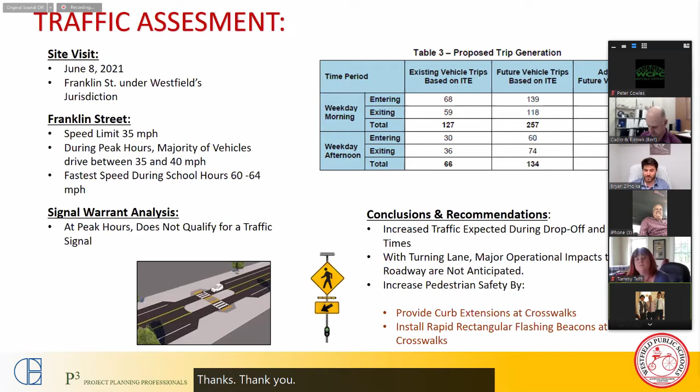Okay. So we can get to the school update now.

First, the site plan. There's been some development since you guys last saw the site plan, I think. We've gone from 4 curb cuts onto Franklin Street to 3, kind of based on feedback from the city, and just the proximity of the bus drop-off lane and the parent drop-off lane, and then you've got the parking lot. So we did kind of simplify that a little bit.

Sorry about that glitch. We've also reversed the flow. So parent drop-offs come in through the parking lot, and then they leave on a shared exit with the buses. And that allows for stacking of 34 cars at any given time.

As you heard, Bryan, I think that this is something that we want to talk about as we develop the project more. If he's talking about possibly 300 cars showing up in the morning, we'll want to think about how we're going to deal with that. So, but at least this has kind of doubled what we had previously with just the cars coming in directly off Franklin Street and dropping the students off.

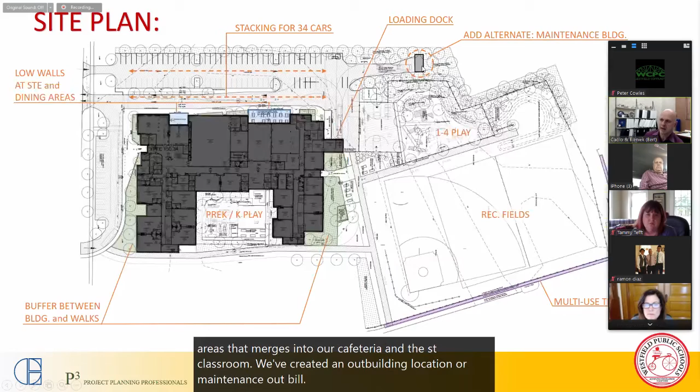We've added some low walls around the outdoor areas that are adjacent to our cafeteria and the STE classroom. We've created a maintenance outbuilding location as an add alternate to the project. That's also a turnaround lane for the truck, so they'll pull in, they'll back up to a loading dock, which

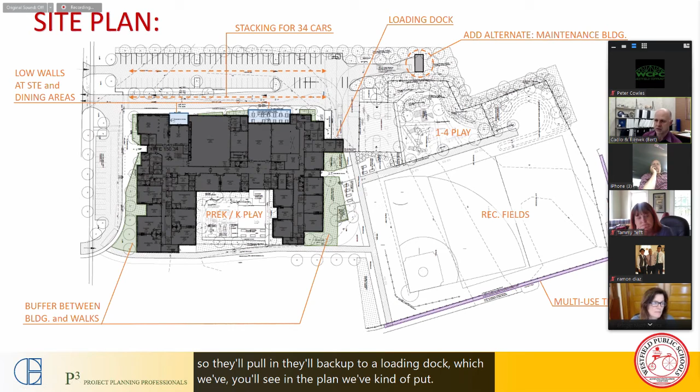you'll see in the plan, we've kind of pushed a loading dock and receiving area out the north end of the building. The grade works well for this so that we don't have to really construct a truck ramp down with drainage and everything, because the grade at the north side of the building is about 3 to 4 feet lower than it is when you enter at Franklin Street off the bus loop.

So the other major thing that we did is we've taken the access to the multi-use path up on the dike that's planned and moved that to Franklin Street rather than coming in at the amphitheater where we'd previously shown it. And that just keeps that access point completely outside of the school grounds, but still readily accessible to the staff if they want to take their kids up onto the path and into wetlands or to the park down the road.

Then the last thing we did is we've created some landscape buffers between the sidewalks that face public areas and the classroom windows, just as an area that, you know, people aren't supposed to be there. So if somebody sees someone up near a window, it's more obvious than if it was all a paved plaza right up to the windows. So it's just a little security thing that we added. So that's the development of the site plan.

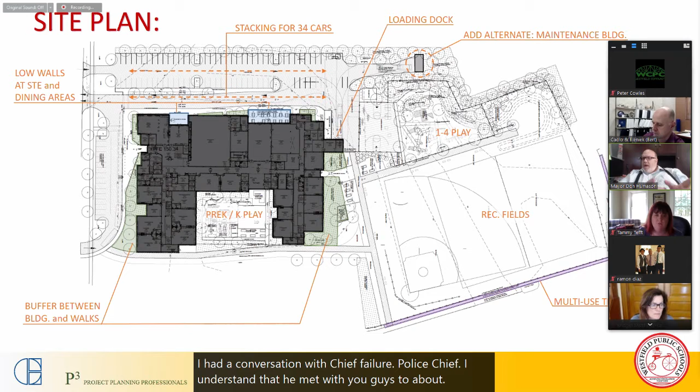Hey, Bert, can I interrupt for a second? Yep. I had a conversation with Chief Valliere, our police chief. I understand that he met with you guys too about the situation in the back with the rec fields and parking around the fields. And I just want to make sure that he had conveyed his concerns about what he thought might happen with people parking back there.

Yeah, so it's not really reflected here, but between the purple line and the property line here, we're going to incorporate some parallel parking spaces. Okay. To get them off the street. That's kind of based on that conversation. The whole moving of this path access is also part of that conversation. His suggestion to do that.

So yeah, we're trying to accommodate as much of this feedback as we can as we meet with various stakeholders in the city. And the police department and fire department obviously are primary contacts and a great resource for us as we're planning the overall layout of the site and the building. Good. As long as you communicate, that's good. Yep. Thank you.

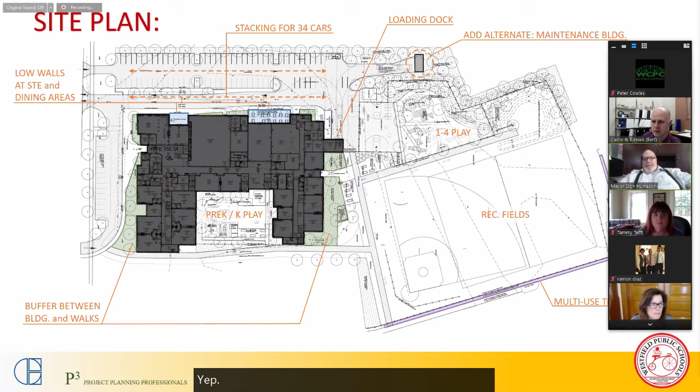As far as the floor plan goes, this is the first floor. I'm going to show you the first floor first. Like I said, the only significant change since we showed you the plans last is that the kitchen has been enlarged, and that's pushed some of our service spaces program outside the building. But in a way, it's fortuitous because it really helps for trucks backing up and having a proper loading dock. We're still within our grossing factor when we do this.

But the larger kitchen exceeds MSBA's guidelines, and that was not reflected in the PSR where they were approving and disapproving things. We're still going to make a case that it's needed for the school and should be reimbursed. And the reason is that this is a CEP school, a community eligibility provision school. So all kids that go to this school are eligible for the free lunch program, and they've got an 80 to 90% participation rate at both Abner and Franklin.

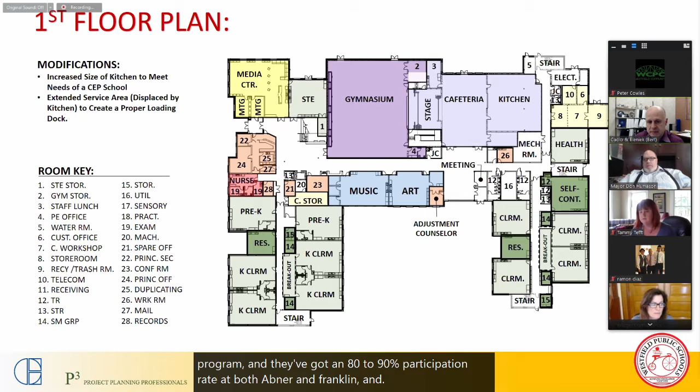MSBA's guidelines don't factor that kind of high percentage rate for lunch participation when they size a kitchen. And we want the school to function for you. We don't want you to open up the school with a kitchen that's going to be too small. So we added about 620 square feet to the kitchen and squared it off, and that would give you the space that you need to support that kind of volume of meals at breakfast and lunch.

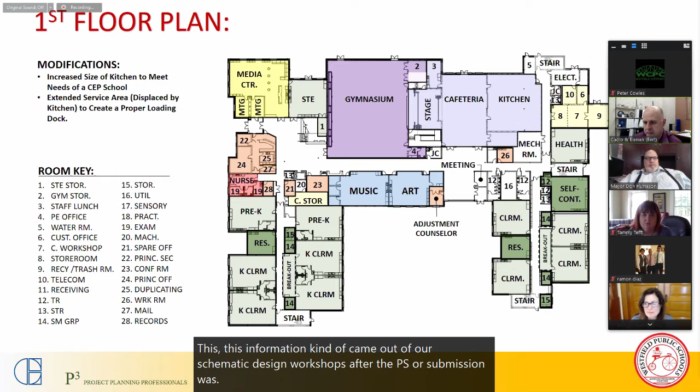That's the major change. Like I said, that's going to be written up and it'll be specifically addressed when we do submit the schematic design binder in our narratives, and similar to how we made the case for a lot of the other Westfield specific needs, we'll make a case for this space as well and why that needs to be larger. This information came out of our schematic design workshops after the PSR submission was put in. And that's why it wasn't included previously.

At the second floor, again, pretty much what you've seen previously. The only change happens over that kitchen area. What we've done is we've pushed and pulled walls to make sure that we're aligning with walls on the first floor, just to make the structural system from the first floor to the second floor more regular. Improve constructability of the building. It also gave us a couple open pathways between the first floor and the roof, which we'll need for our boiler flues and for the exhaust out of the kitchen cooking battery. And the rest of the floors remain the same.

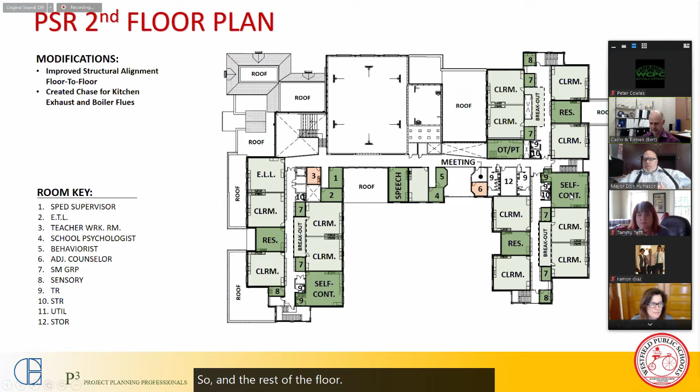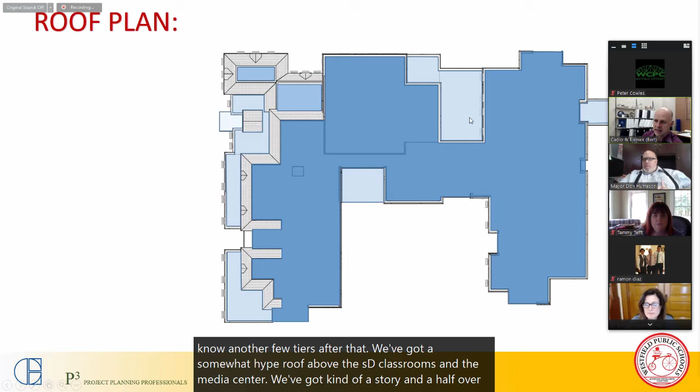I included a roof plan this time, and we haven't really shown a roof plan, but this is just to show any of the blue shaded areas are membrane flat roofs, basically. The darkest one is the highest roof, and then we've got another few tiers after that. We've got a somewhat high roof above the STE classrooms and the media center. We've got kind of a story and a half over the cafeteria space and the music classroom.

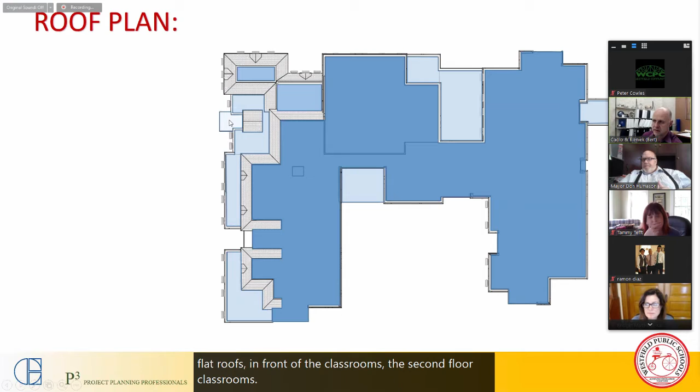And then at the first floor, we've got some flat roofs in front of the second floor classrooms, and then the lowest roof here is the canopy. But basically, just to show you that we're trying to simplify and have some organization and sense to where the roof lines fall. And then the gray shade is just your pitched roofs that we've incorporated into the building.

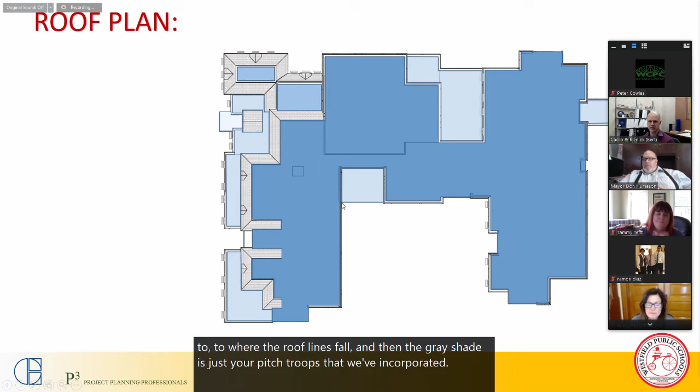So with that, we'll take a look at some of our pictures of what we think the building might develop into. And please excuse the colors, trying to get them to be reflective of what we were really thinking wasn't as easy as we had anticipated using our Revit software. But hopefully you get the idea. Yeah.

This first one, option A, and I just gave them options so that we can talk about them easily if you want to jump back and forth. But option A, one thing we've done is we've changed the shed roof profiles that we had to mansard so that they finish off a little bit nicer when they return back from the street face. This is the ashlar bond.

This is the only one that we carried the ashlar stone in because based on some feedback since our last meeting, there's only one church building in Westfield that carries that motif, and predominantly your masonry buildings are more brick, and more of a red and a beige scheme of brick. So that's where we are leaning with our development, but we just included this one still as a reference point from the last presentation. It looks expensive. Right. Everything is expensive. Right. That's the reality, unfortunately.

So speaking of costs, though, we had talked about metal standing seam roofs the last time. There was some concern about snow sliding and the differences between the two. Metal standing seam is a little bit more money than an asphalt shingle. So in our base bid, we're planning to carry an asphalt shingle, which is what's reflected in the straight on elevation here. Standing seam would be more of this blow up here. And the blow up in all of these is basically this portion of the front elevation so that you can reference yourself to what you're looking at.

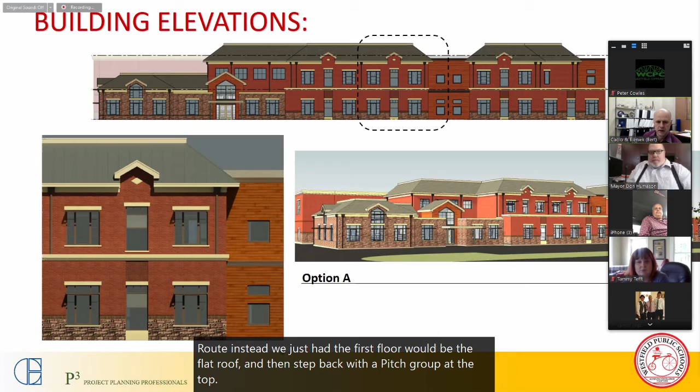Then in option C, we mixed it up. The brown or tan brick should be more of a beige family or a cream family, and probably a couple subtle color variations of that, so that it's not a flat beige wall. And we put the red brick at the base in this option. So that's really the primary difference. The other thing that we did on this is we changed the roof color with the shingles or with the standing seam. We'll have multiple options available to play with the colors. And then darker brick accents instead of the precast as the window headers in this one.

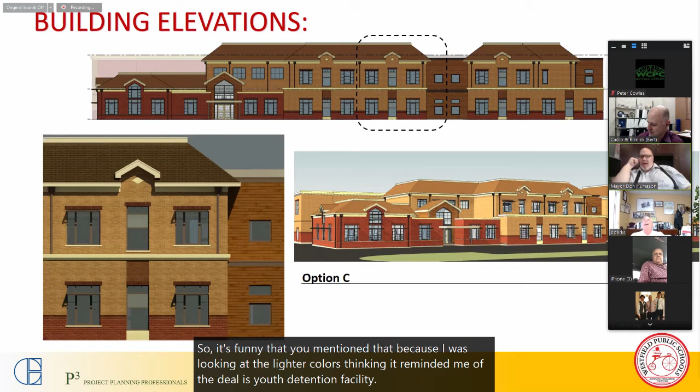The other two seem more of like a middle school and above type of building. Mm-hmm. Not that I have any reasoning why, but I like the lighter color. So Bill, it's funny that you mentioned that, because I was looking at the lighter colors thinking it reminded me of the DYS youth detention facility up on East Mountain Road. And I like the darker brick more, but again, it's no particular reason. It's just a feeling. That's all.

Yeah. I don't want it to look like a youth detention facility.

And Don, I was with you. I really liked the way that first the 1A looked. I don't know, I really liked the look of that one. I don't know why, but I did. That was my first knee-jerk reaction, but I really liked that brick look. To me, that speaks of New England schools. Again, that's what Westfield State College looked like when I was there. So maybe Bill's right. It does look more like a college or a university than an elementary school, but I just think it's a very handsome, all three of them are, but I like A the most personally.

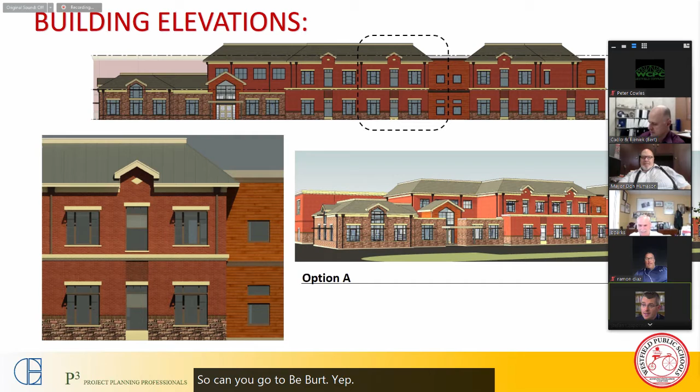So can you go to B, Bert? Yep. How's that? And now to C? Yes, please. Okay.

So I'm with Bill. I like C, because it's a lighter school. And I'll tell you why, though, because the Tech Academy up the road is the top color of this building, the upper campus. And the red is the same as all of our other elementary schools. So like you all, it's just a feeling. It's the first thing that came to my mind. The upper part of this building looks like the upper campus at Westfield, or the old Westfield High School. That's all I thought. No rhyme or reason.

So did you guys like the look of the stone from option A? Because that's one thing that Bert's really trying to narrow down, the materials we're using. So this option is a totally different material for the media center, and obviously the color right now is a little off, but this is a material that Bert's looking at. So if you guys are not interested in this material at all, then at least he can wipe that off his list as far as estimates go. Tammy, I like that material. I'd like that for the whole building. That's because I'm sitting in one right now that looks like that. Well, and I liked the look of this stone. I'm not a huge fan of the color. Yeah. Architecturally, it looks really neat when you see it.

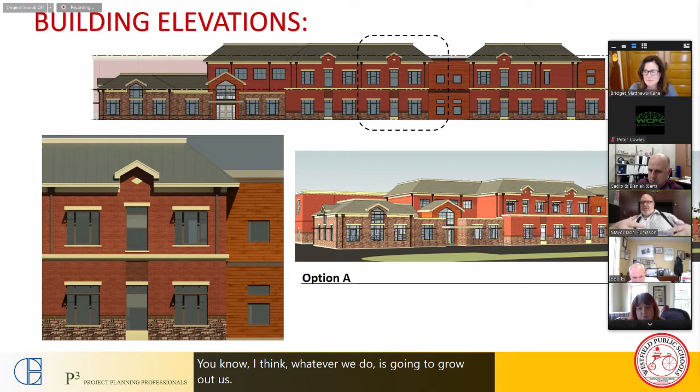So I like them. Listen, I like all three. I think they're all beautiful. I think that building is really attractive now. And as Tammy said, it's starting to come to life. I think whatever we do is going to grow on us so that we're all going to come to really admire it. I agree, 100%. So I defer. That is absolutely true. Yep. I'll defer to anybody else.

Stefan, do you like the Tech Academy? Say that again? Which one did you say was like the Tech Academy? Because I'm at the Tech Academy. Option C. If you look at the top color. Really? Okay. Upper campus is that color. Okay, because I'm missing that. I guess maybe I see color differently. Well, it's a lighter brick up top. Dan, am I crazy? You spent a lot of time up there. I think the mortar's lighter. I think the brick is still brick. Upper campus. Yes. It's not that light. I'm literally looking at it right now.

The inside upper is definitely that color. It's also glazed. The front of the building is more of that color, the entrance. What was the color of the old entrance? Okay, got it. Bridget has her hand up.

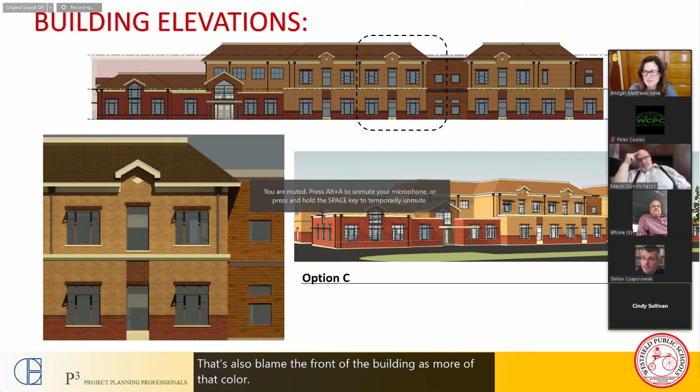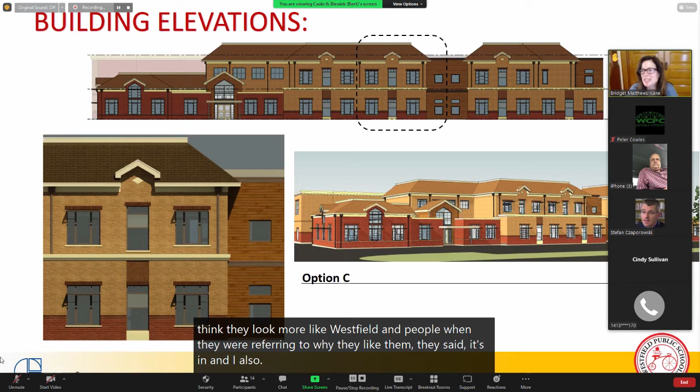Yeah, I like them all. I think they're all attractive. I just like B and C better because I think they look more like Westfield, and people, when they were referring to why they like them, they say it fits in. B or C would fit in better in that neighborhood. But the colors do seem like B, like that beige looks a little greeny right now. It might help to see a different version of it. But I prefer B and C myself, even though I like A. So the brick, more of the mason brick style versus the ashlar stone.

One of the things that you all brought up at the last couple of meetings was you wanted to make sure that the entrance was defined. Do you think that Bert achieved that goal with the material change? Yes, I think so. I agree. I think once he continued with the material for the media center and made that stand out, the entrance stood out more.

And I have to give Bert a compliment now. No, I will. I thought it was a good question, Dan.

We struggled with the whole idea of a pitched roof versus a flat roof and the pros and cons of it. What Bert and his teams have done is they've taken what I feel is the best of both worlds. We still get the majority of a flat roof, but we get the look. To me, this looks a little more residential with the pitched roofs and what I call the little gables. So I think he did a really good job. And once we start picking colors, that's going to tie it even more.

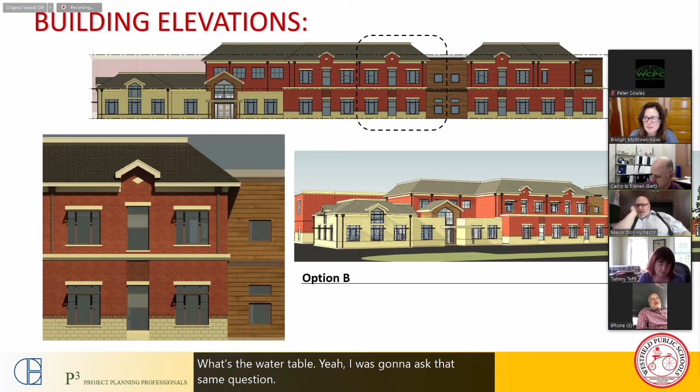My only concern is that the water table has to be polished so that graffiti can be removed. Like a ground stone. Right. What's a water table? Yeah, I was going to ask that same question. The little band at the bottom there is a water table. I call those water tables.

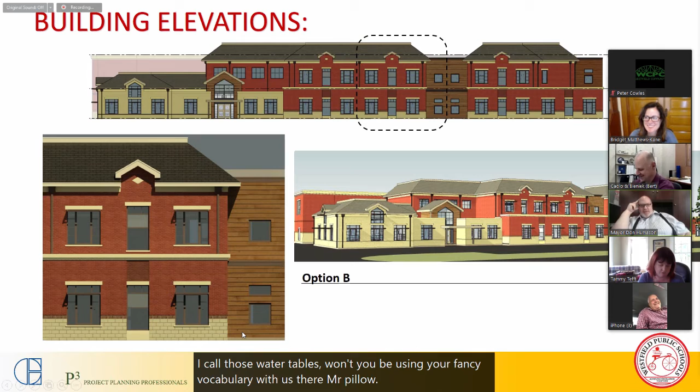Cindy had a good question. What was that? So should the water table be the darker color? Wouldn't that cover the stains better than a lighter brick? If we went with brick, we would probably put a graffiti coating on that. Okay, gotcha. Because you can't polish brick really. You can polish some of the other stuff, but not the brick. Correct. But we would put a coating on it.

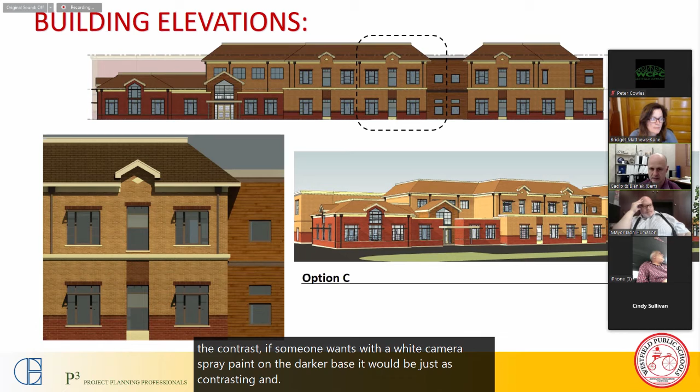And the darker color, most things that people graffiti with are darker colors. So if someone went with a white can of spray paint on the darker base, it would be just as contrasting and obvious as a can of blue spray paint on the lighter base, I guess.

It's kind of a losing battle. Dan's right. We really want to make sure that whatever we do, we've built something into it to make it easy to clean up after it's done. Yeah. I don't want Brian hunting me down. Hey, by the way, I think the entrance sticks out more. There you go. Yep. So you get an extra one there on the entrance. Agree. I agree with Bill. I like C. C's my vote.

My son is on the mound.

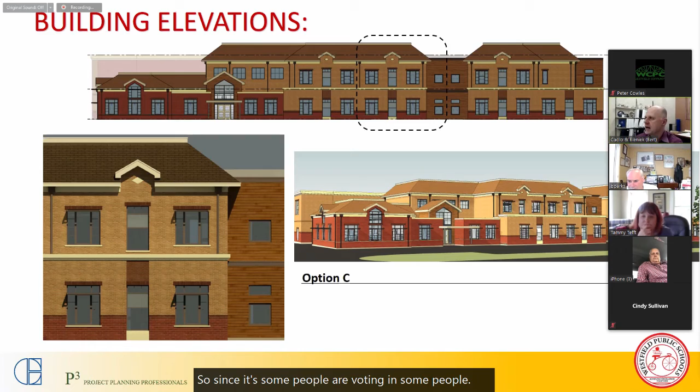I gotta mute myself. So since some people are voting and some people aren't, and I don't know if we want to get into this now, but we could. I did surveys for a lot of the schematic design workshops because obviously I wasn't going to meet with every teacher in the district, but we could survey the teachers in the district for a first grade or a special needs room and ask them questions. I could put a quick survey together that could get issued sometime this week to the committee members, and you could just say which option you like best. As long as it includes pictures.

They cannot do that. You cannot do that, Bert. I can't do that? No, because of the open meeting law. You cannot deliberate or vote outside the meeting. Yep. Even if it's a poll and it's not an official thing, huh? Correct. You can't do it. You still cannot deliberate. Okay. So can we vote? Are you looking for a vote? I don't think it's necessary for us to vote. I don't think it is either.

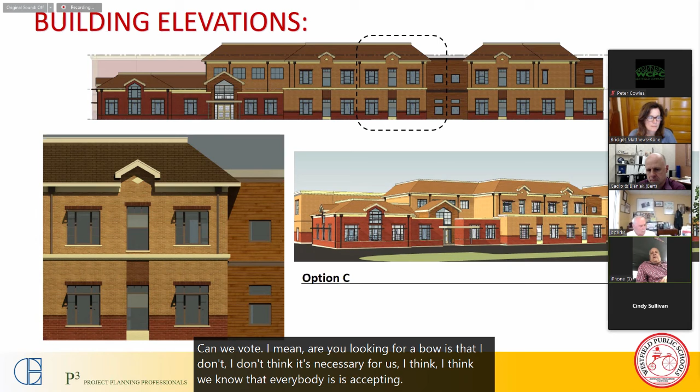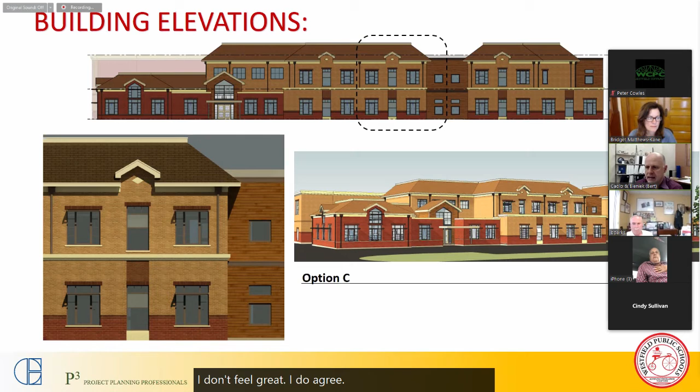I think we know that everybody is accepting of the masonry products and the cement board products around the stairwells. That's enough that I need for estimating. I don't know, Bert, do you agree? I do agree, and I can tell you that we did send our documents out already to the estimators, and what we carried was the stone. And the reason we carried the stone was because it's a little bit more expensive than the brick. And if it comes back that we need to value engineer this cut stone product, that gives us a cushion. That's why we did it that way.

Yeah. Okay. I also think it's important for the committee to actually feel the materials. So we'll be in person by the time we need to make this decision, and you can physically hold the bricks, see the bricks, touch the faces of the bricks. It really does make a difference. Perfect. Excellent. I'm fine with not voting on anything we don't have to vote on. I agree with you, Dan. Okay. I recorded that, Brian.

I'm sorry, I was breaking up. Bert, as far as material, are you set on everything for the estimators? Yes. I think so. I think that there was no real objection to what we showed tonight as far as the materials go, and that's really what we were hoping for, or else we would have had to follow up. But based on the feedback, we're good. Perfect. Great job on these. That's awesome.

It looks nice. Can I ask a simple question? Are you happy with the direction that we're taking the project and that the team is going? Do you feel like we're going in the right direction? Yes. As opposed to what other direction could you be taking us in? Well, you might all have not liked it, and you might have said, "Hey, put the brakes on, this isn't going to work." No, I don't think that's the case, Tom. I think Bert has done a tremendous job of listening to comments, but sometimes, at 3 a.m. when he's drafting this stuff, it slips away. Only because that's the schedule you're making them on, Dan. Let the guy go to bed by 2.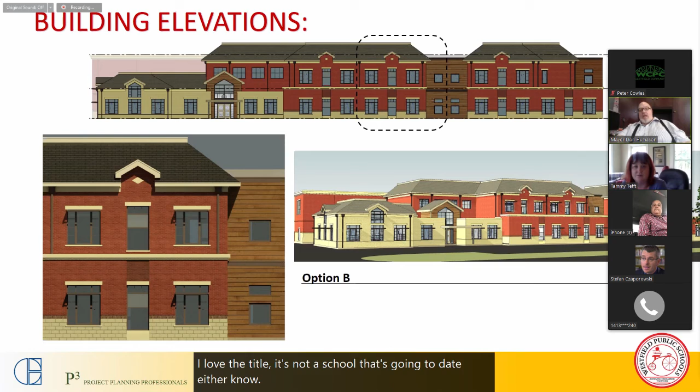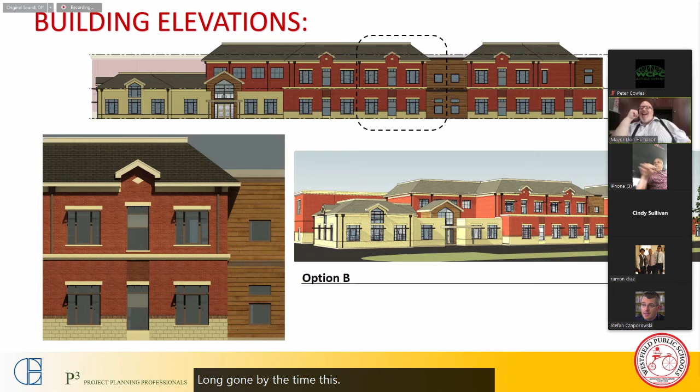Absolutely. I love the roof line. It's not a school that's going to date either. No, it looks good. Because it has to last for 120 years. Yes. No offense, folks, but we'll all be long gone by the time the school has to be replaced. No, it looks very nice. Yes.

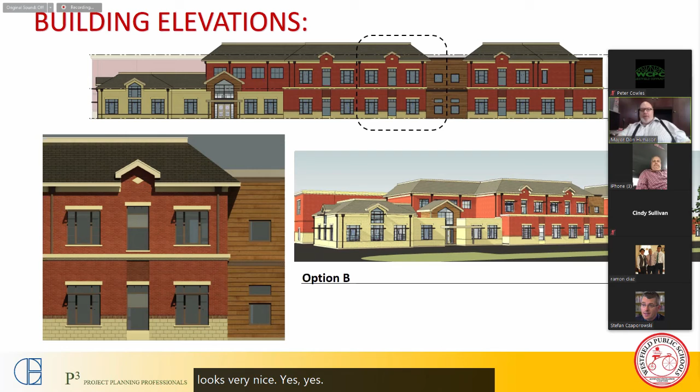What's the next step? What do we need? I was gonna say, Bert, do you have anything else? Or are you good? I think that the next building committee meeting will be, actually, I don't know. Is it just before we submit, or are we doing 2 in August? I think we're going to need to do 2, Bert. I think we need to talk to them about finances and have one meeting solely on finances.

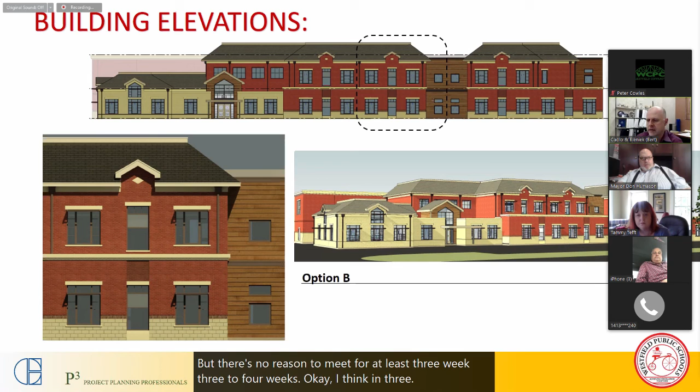When we get the estimates? When we get the estimates, okay. It's possible we could vote SD at that meeting, but if not, we'll need that second meeting. But there's no reason to meet for at least 3 to 4 weeks. Okay. I think in 3 to 4 weeks, what I was going to say is we'll probably have some interior renderings of what some of the interior spaces are going to look like.

Similar to tonight, we're pretty well familiar with what our materials are going to be inside. Walls are going to be sheetrock walls, metal stud framed. And then the nuances, if you don't like materials, you don't like what we're showing, that all can get worked out in design development. It's not critical, but you should at least see some of the images that we're going to submit with our schematic design package. So we'll share some of those before we submit to MSBA in late August.

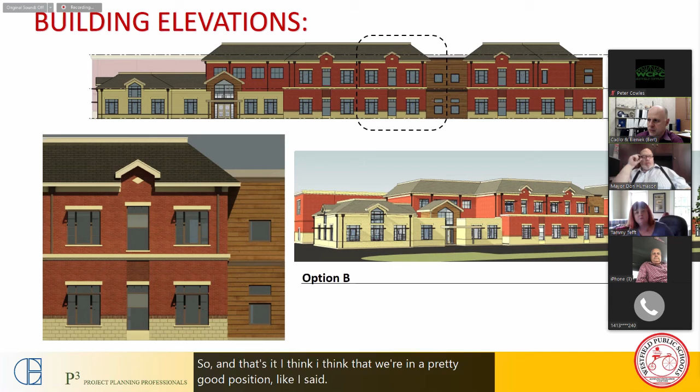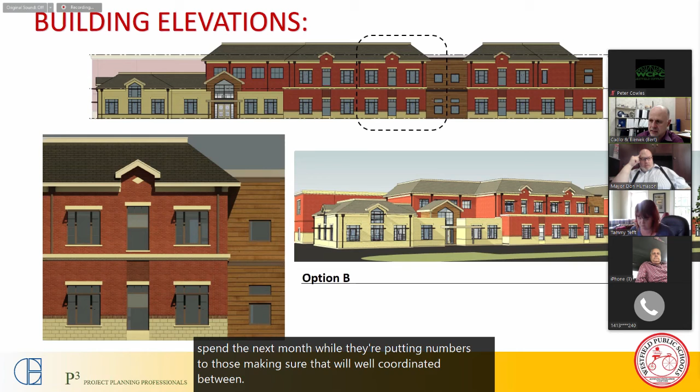So that's it. I think that we're in a pretty good position. Like I said, at this point, we got the stuff out to the cost estimators. We did a project manual, which is listing the quality of materials that we want, what the materials are going to be. And then we've got a set of drawings too. So we spend the next month while they're putting numbers to those, making sure that we're well coordinated between trades and the spec and the project manual language, and then we're working on the narratives, basically. The binder piece of this submission is what we'll be working on over the next month. So I think we're good.

Do you have any sense that materials are coming down a little bit, or are they still wicked high? It's varying by trades. Wood appears to be dipping a little. Steel is still a little higher than I'd like to see it, but we are still a ways away from bidding, and I wouldn't even concern yourself with it. Okay. I mean, we're going to carry a healthy escalation number and push the limit with MSBA because they don't want to see a project come in over either. But we're gonna make sure that this school is value engineered to the point where it is a cost efficient school while giving you what you want. And cost efficient doesn't mean cheap.

Nope. This definitely doesn't look cheap. It looks very, very good. Masonry, though, I'll give you guys credit. Masonry has kind of become the most economical, durable kind of envelope for a building. The rain screens where we're showing the fiber cement, that's much more costly, which is why we're limiting it to just accent locations. Good. Thank you. We know what we're doing here in Westfield. Absolutely.

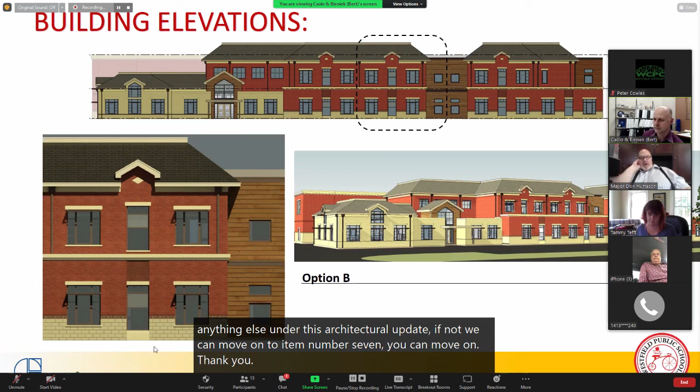Anything else under this architectural update? If not, we can move on to item number 7. I think you can move on. Thank you. Very good. Yeah, I'll unshare my screen here. There you go. Very good. So item 7 is simply any other items not reasonably anticipated 48 hours prior to this meeting. Is there anything that we have to talk about? All right. Do we need to set a date for the next meeting, or will we wait? I think since we have 2 independent estimators and we don't have the reconciliation meeting because they're both independent, it's hard to give that date. Okay. All right, then we'll expect to hear back in a couple of weeks.

Right. Do I hear a motion to adjourn? So moved. Second. Roll call, please. Mayor Humason, yes. Stefan Czaporowski, yes. Ray Diaz, yes. Ryan Perret, yes. Shelley Hazlitt. She left at 5:56. Yep. Thank you. Bridget Matthews Kane, yes. Phil Park, yes. Cindy Sullivan, yes. Tammy Tefft, yes. And Lisa Benoit. Yes.